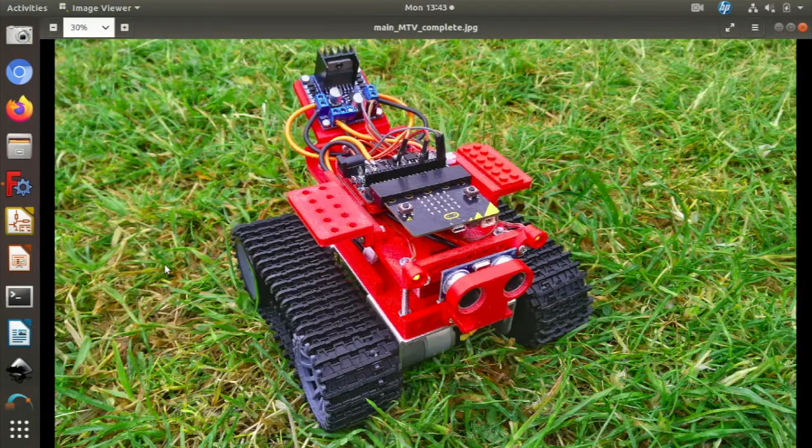It's Joe here again, and I've been asked to make a follow-up tutorial continuing our work with FreeCAD. If you haven't watched it already and you're interested, we did a getting started with FreeCAD video last time, so if you look on the Ffiws channel you will find that and you can go through that. And we're going to build on that today, and we're going to explore some other ways to create objects and extend our knowledge of the sketching tools in FreeCAD.

What we're aiming to do, so I'm quite proud of this, in this month's Hackspace magazine, who some of you might know that I write for, I was asked to write a tutorial about building up a robot. So I've designed and built this robot, apart from the bottom bit where the wheels are and the metal chassis. That's an off-the-shelf kit available for about 20 quid off eBay. But the rest of it I've designed and built myself. So all the red stuff is stuff that I've designed in FreeCAD and 3D printed, and then I've added some electronics which I'm not going to particularly talk about today to control it.

So the thing I think is cool about this robot is that everything is modular. You can see that it has all these little racks of holes in various points across the front here, and you can see that bits like these little LED headlamps have been attached to these hole points, and these holes are all on 10mm between each hole in like a grid wherever they appear. So that means that it's kind of modular. It's quite easy to make extra parts for it.

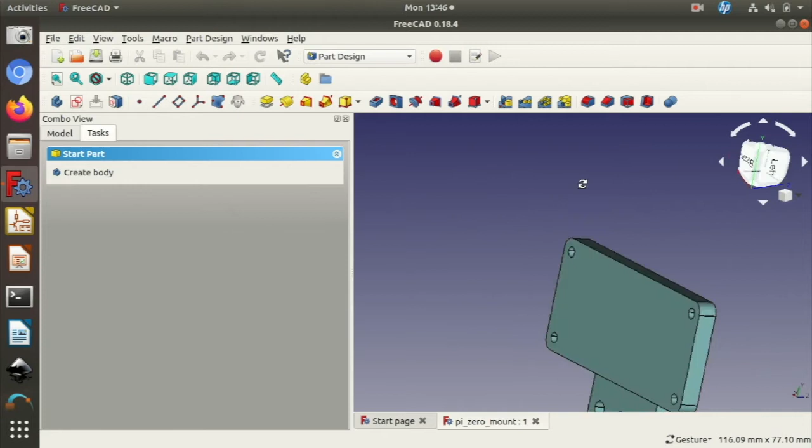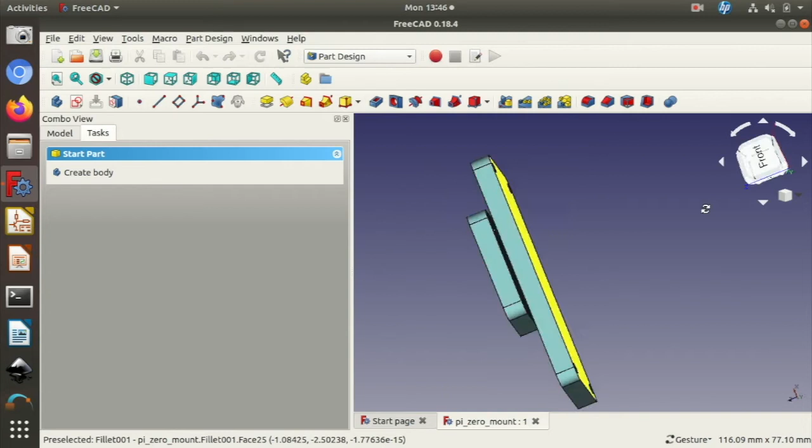As you can see, this main rectangle here is exactly the size of a Raspberry Pi Zero computer, and these four holes are the same size mount holes as the little Raspberry Pi Zero computer has, and so it should mount up to there with some nuts and bolts pretty precisely. And then the only other bit is it has this tab which has three of these mount holes which are the same size and at the same spacing as the mount holes on the modular robot.

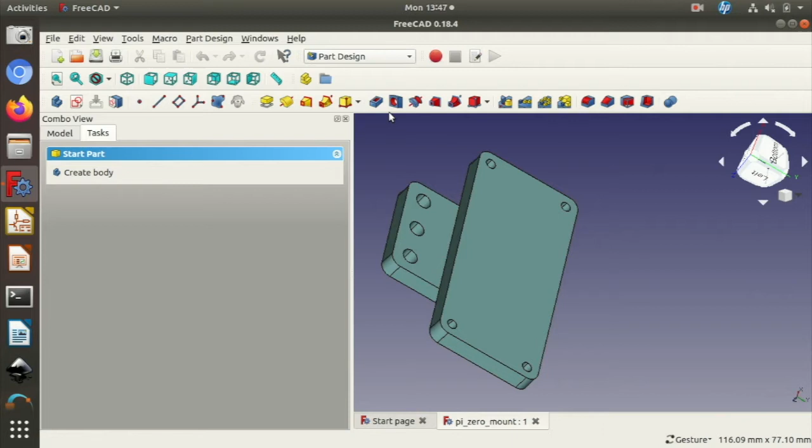You can see that when I've opened this file, it's opened in the Part Design workbench as opposed to the Part workbench, which we used in the last tutorial primarily. There's a few reasons that I've done that. So what I'm going to do now is I'm going to close this, and I'm going to create a new project, and we're going to start again. But if your version of FreeCAD hasn't opened you up onto the Part Design workbench, go there now.

Okay, so the first thing that you'll see is the Part Design workbench offers you as a starting point this start part, which is hard to say, and it has this Create Body option, which we are going to click in a second. So in Part Design, everything you design should be part of a body. You can have more than one body in a project, but a body is an object which is a single continuous solid object. So that means it's not like an assembly where you might have two or three different objects. In a single body, there would be one object, and it would be continuous. It wouldn't be like a blob of something with a totally separate blob of something else, because that wouldn't be continuous then.

A way to think about it that's quite easy is if you imagine a nut and a bolt. If you have the nut and the bolt separate in your hands, then they're two separate bodies. So if you wanted to model them, that's how you would model them. If you put them together, they're still two separate bodies, but they create a fastening assembly.

So they're still actually separate items, it's just that their mechanisms join together. So yeah, so we're going to create a body. The other thing of note about a body, and this might become more obvious as we go along, is that a body automatically fuses together any objects that are touching within it.

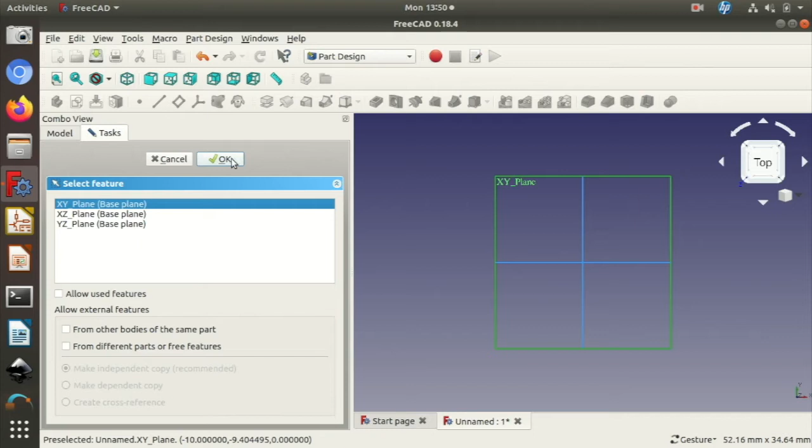So we'll OK that. And then it jumps us to the Sketcher workbench, which should look familiar from the last video. So we're going to start our sketch in a second, but I've actually downloaded a little plan from online of a Raspberry Pi Zero, just to remind me of the dimensions that we're aiming for. So basically we're going to make that first big rectangle. So we need a rectangle that's 65 millimeters long and is 30 millimeters high.

So to do that, we're going to use the create rectangle tool, and we're going to draw our rough rectangle again, and like last time we've got these 4 degrees of freedom, so we need to constrain it somehow. Okay, so a couple of different things that we didn't do last time. We're going to start to use this constraint here a lot more, which is where you create a symmetry between 2 points with respect to another line or a third point. It's a really, really useful way of constraining a sketch.

So what I'm going to do is I'm going to select that point there, that midline there, and this point here, and I'm going to click that constraint button. Now you can see what it did was it made the distance between this point and that line and this point and that line equal, and it is now constrained to always maintain symmetry around that point. I'm going to do the same with that point, that line, and this point here. So now it adds these 2 little red triangles, and this creates a symmetry there.

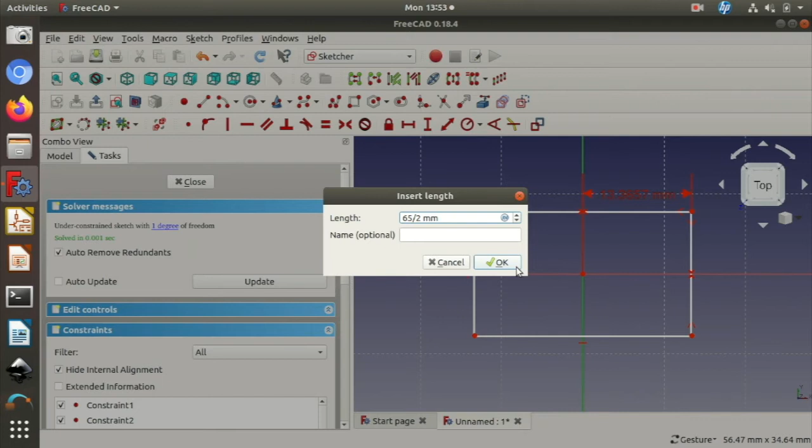Now, if you are clever, you can work out 65 divided by 2, but here's a top tip. In FreeCAD and lots of other CAD environments actually, and in Inkscape for example, if you put in 65 divided by 2, it will work it out for you to 32.5. Not too difficult to work out half of 65, but if it's a more complex measurement, then it's worth knowing that little tool.

Okay, I've forgotten how tall. No, I haven't. It was 30 millimeters tall. So we'll click that line and that one, and we'll put a vertical distance of 15, obviously half of 30. Okay. So there we go. We've got the outside without the sort of radiused edge. Actually, we could add those radial corners at this point.

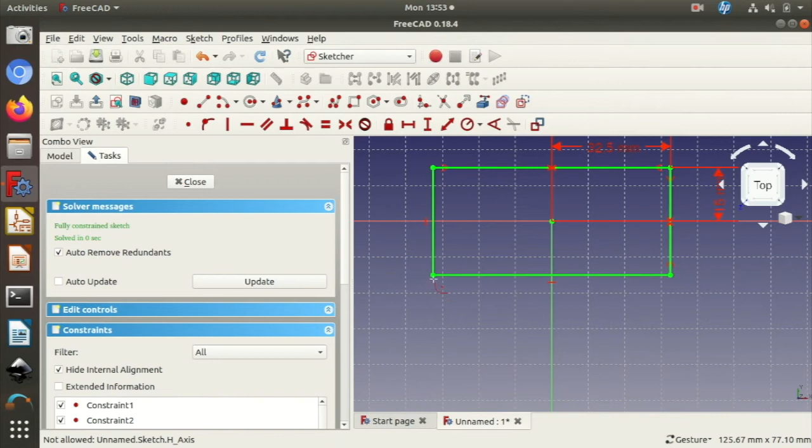This tool here is create a fillet between two lines or at a coincident point, and you can click a point and it will add a fillet, and then you have to constrain the radius and sort your lengths out again. So actually I tend to do fillets at the end when we've got the object back in Part Design, by clicking the lines on the edges and using the fillet tool.

So we'll do it that way, but that's just to know that that's there. Okay, what else do we need on our plan? Well, we need these 4 holes here. Okay, so to do these 4 holes, we are going to draw some circles. So what we're going to do is we're going to draw a circle, and we're going to roughly put it

in the right position. Interestingly, in the Sketcher tool, if you think of these 2 lines intersecting, and this is 0 and this is sort of coming out positive. If it was a graph, it would be counting up this way in numbers and counting down negatively this way. FreeCAD isn't too worried about whether numbers are positive or negative in the quadrants. It just imagines. So say you set a distance between this line and this point here. It doesn't need you to put in minus 27.24 or whatever. It just presumes that that's what it is because of where it is on the page. Anyway, don't worry about that too much.

What we're going to do is we're going to set the diameter of this hole to the diameter of the hole that is on the plan, which was, I believe, 2.75 millimeters. Yeah, 2.75 millimeters. But this is written as a diameter, so again we can use our divide by 2 to set the radius, because you set the radius with this tool. So we're going to click this tool and it asks for the radius, so we're going to say 2.75 millimeters divided by 2, or 1.375 even. There we go. So that's sort of the right size.

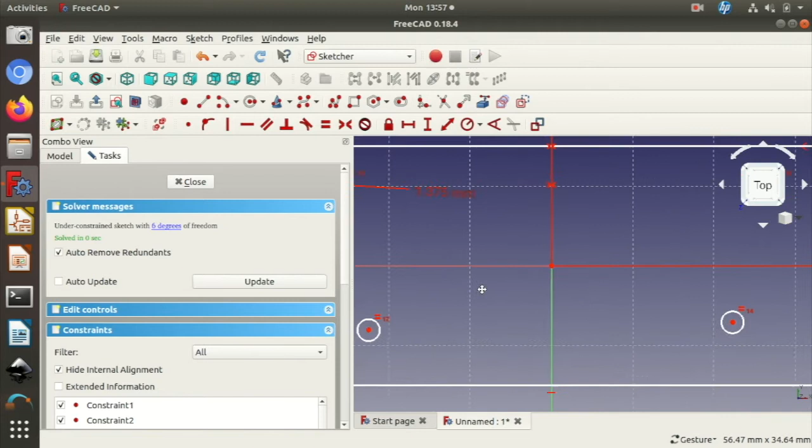So what we're going to do is just zoom in a little bit. I'm actually going to use the same idea. So I've selected the centre of that circle, this middle line, and then I'm going to move across and I'm going to select this centre of that circle, and I'm going to select a symmetry between those. So again, those are going to be symmetric around this central line. I'm going to do the same on these circles, select those,

and then I'm going to do a really bad zoom and lose my work. So there we go, just use the zoom tool to bring that back in. Gosh, zooming is a pain on this laptop, it has to be said. Oh dear, it's hard because it's so small. There we go, that's better.

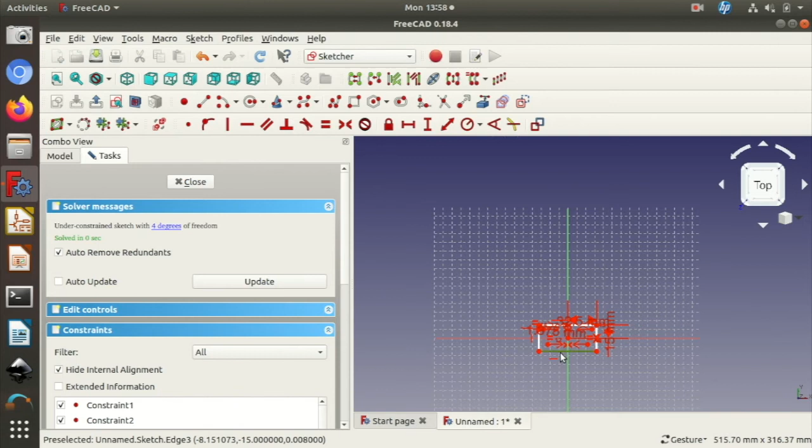So where were we? I selected that one. That one's got one there. So I'm going to do a symmetry between this and this. There we go. Oh, I obviously selected too many things. 1 point, one line. Oh, there we go. Okay. Now I'm just going to have a quick look at the plan.

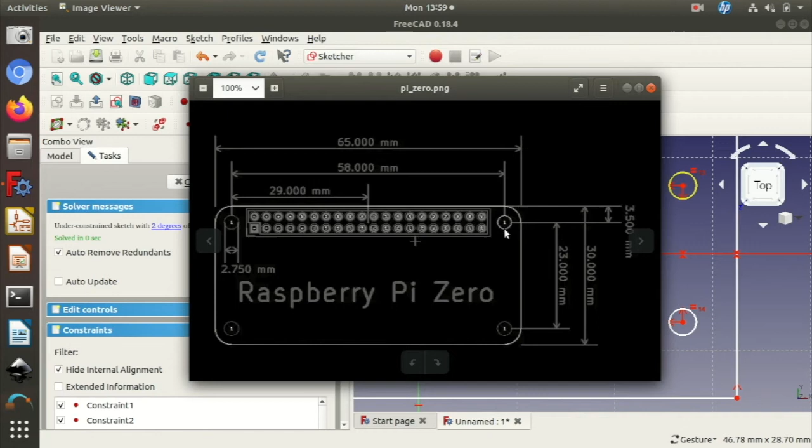So again, we see that the hole centres from the centre line of the board are 29 millimetres, and they are all 23 millimetres between the centres of these two holes. Okay, so if we select this and select the vertical height there, we can do it as 23 divided by 2. And then if we zoom out slightly and select the centre of that one and the centre of that one, and select the distance between this and this as

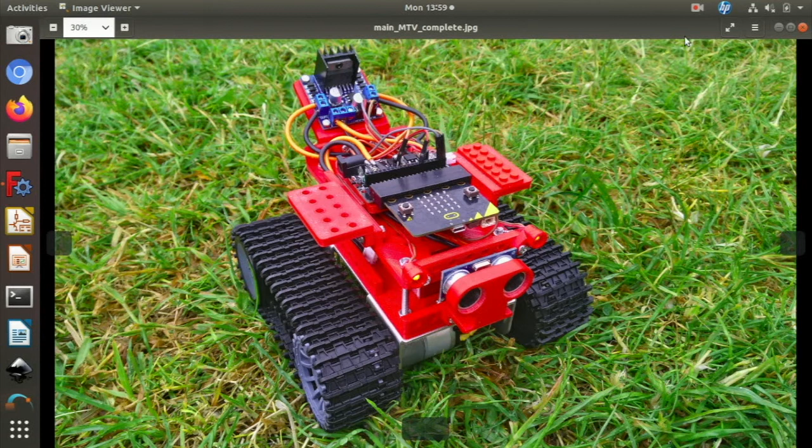20. No, what was it? I've forgotten. I've closed the plan. Was it 53? I can't remember. Let me just find that. Plan again. They were 58. There we go. My memory is useless. 58 millimetres. So put that at 58. Okay, there we go. So it's all gone nice and green. Everything's in the right place.

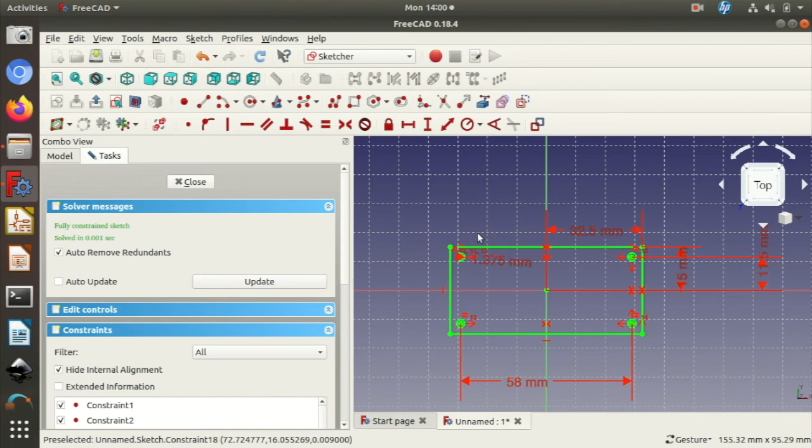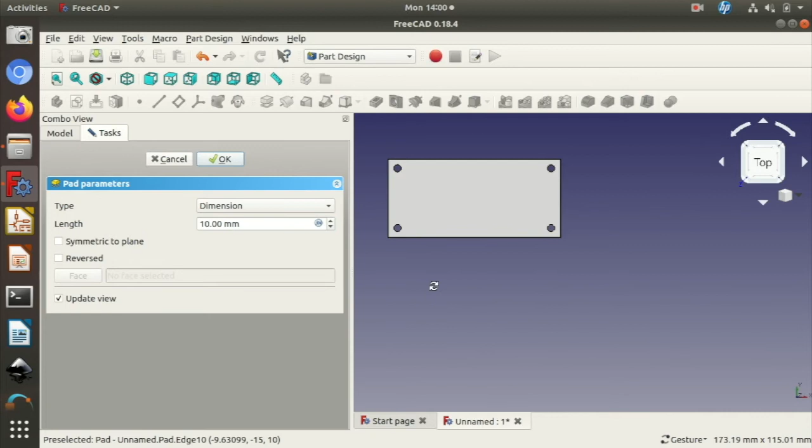If we wanted to tidy it up a little bit, we could move some of these constraints out of the way so we can see what things are applying to what. If we close that now, we have a fully constrained sketch in the preview window. So yeah, we've got some tools, the things that we can do with that sketch, and similar to the last video, we're going to use the pad tool, but 10 millimeters is a bit thick. I've been making these brackets 4 millimeters thick. So there we go. So we have our rectangle.

Now, of course, we want to add that other part that we're sticking off with the mount holes. So what we're going to do is create another sketch, but we're going to map it to a face of this object. So I'm just going to make sure that I'm on the top view here. So we're looking down again as if this was the bed of the 3D printer, and I'm going to select the top face of this object, and I'm going to click the sketch button again to add a new sketch.

Okay, so now we're back in the sketcher, but we can't change any of the original sketch in this because this is like an additional sketch, but we can add another sketch and pad to it, and it will be joined to the original article. So what we're going to do is draw a rectangle roughly in the right place for where we want it, and we're going to do some very similar things again.

So it's good practice. We select that point, that line, this point, make a symmetry. We're not going to make a symmetry this way because we want it to be off center and to be hanging off the bottom of this part. So I think we want this dimension to be, I've missed that. We want this dimension to be, I think I have this at 25 millimeters or 30 millimeters, 25 millimeters. Can't remember. That looks about right. Yes, so that's pretty much the object that we need.

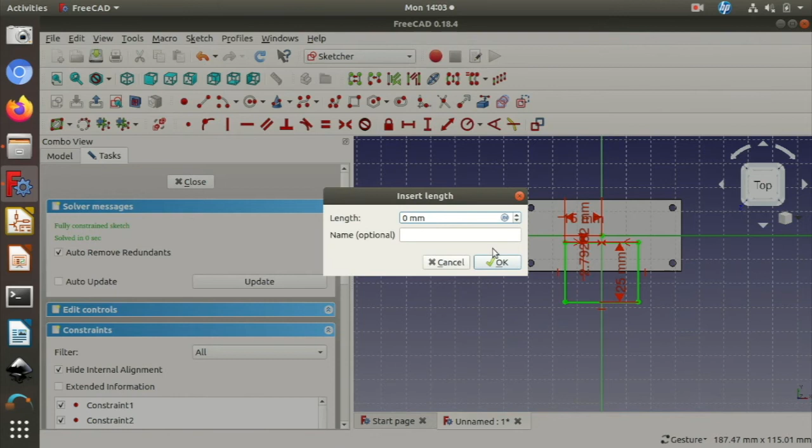We've got 2 degrees of freedom. So one is that it doesn't know where it's anchored, what position it's in, and one is the width of the item here. So if we create a horizontal constraint between that point and that line, and we make that 15 because I think we want this to be 30 millimeters. And then if we get that point and this line and give that a vertical distance of 0, then it basically just ties the top of this object to that line. And that's a fully constrained sketch.

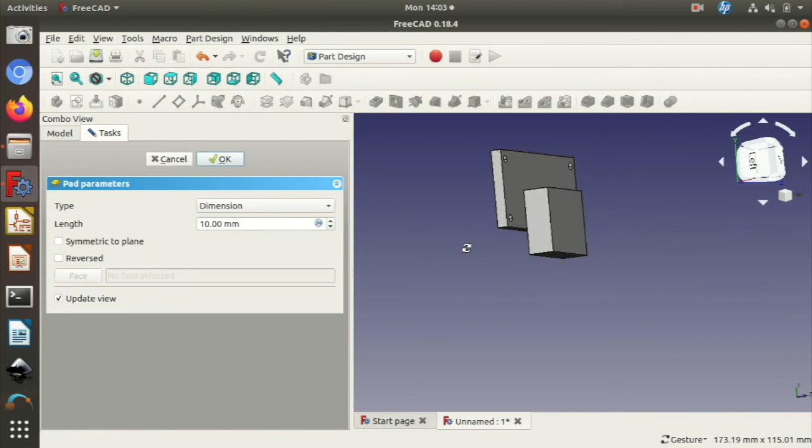Okay, if we close that again, we're going to pad this sketch. Now, I can select this sketch and I'm going to click the pad tool up here. Again, it automatically sets it at 10 millimeters. Actually, I'm going to change how we do this. What I was going to do was map another sketch of this face and put 3 circles on. No, I will do that, because then I get to show you another tool. That's what I was planning to do. Sorry about that. Let's make that 4 millimeters again.

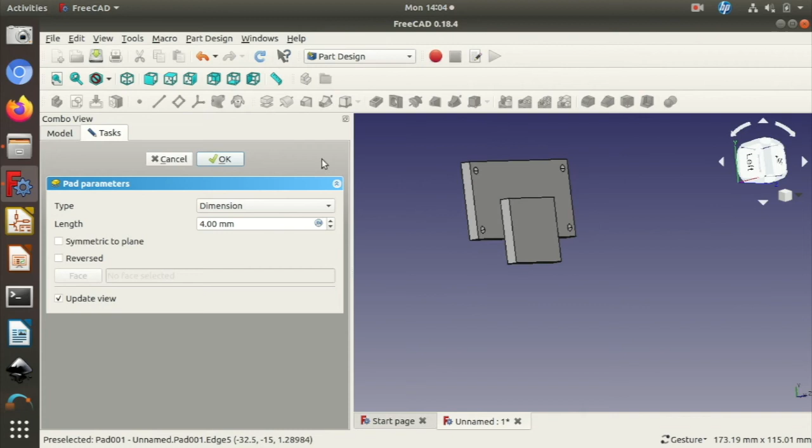And actually, I don't think it's quite sticking down off this piece enough as the one that I made previously. So let's just OK that for now, but then let's go back in and edit this sketch. So we're going to find this constraint, and we're going to change it to a distance of 5 millimeters. That looks better to me. Close it, and then you see that we've moved it down. Okay, so we're getting there.

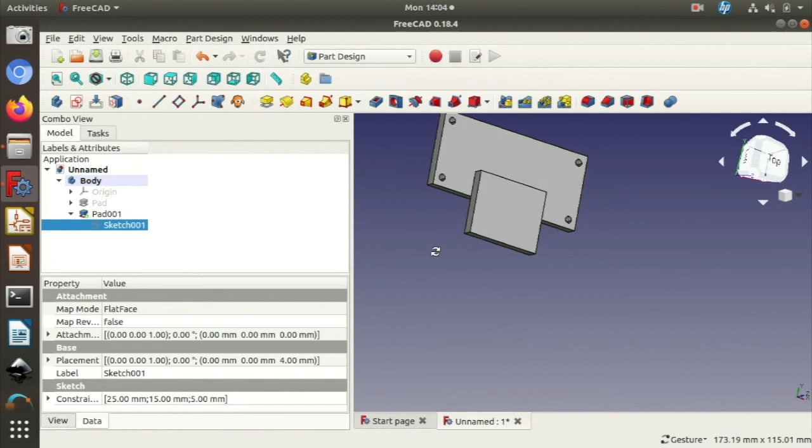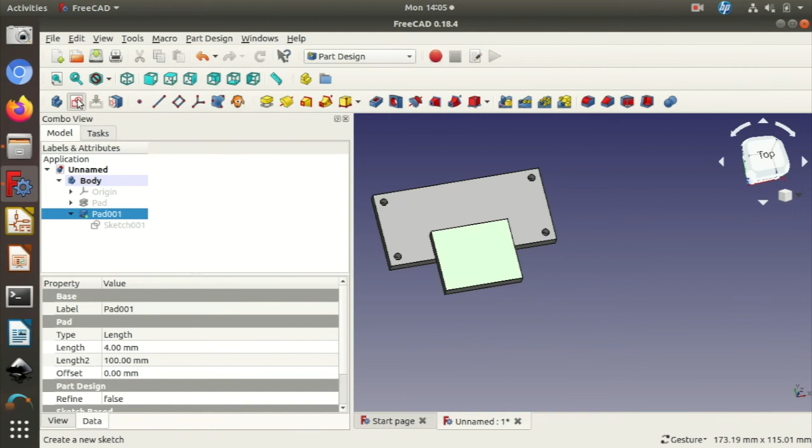We've got our big rectangle, and we've got our small rectangle that's been padded. That's going to be the kind of mounting bracket. And again, we haven't had to select these objects and combine them together. They just automatically are together. Okay, let's make the holes and then let's put the nice fillets on to make the corners nice. So to make the holes, we want to put the holes into this part of the body. So again, we're going to make a new sketch that's attached to that part.

Okay, so there's a few little ways that you can make holes from sketches. The way that I'm going to do it is to use a hole tool, and the hole tool just needs to know that there's a circle in the sketch that it wants to turn into a hole. It doesn't actually need the circle to be the right size, but I am going to make it the right size just so that I can show you an alternate way that it would work.

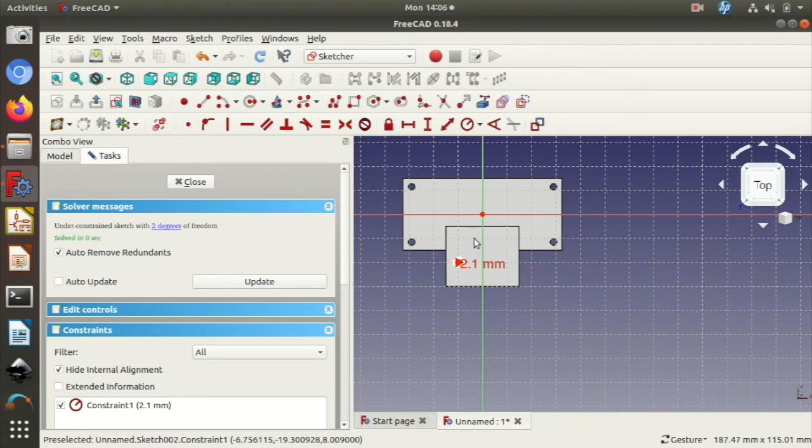So I'm going to draw a circle, and then I'm going to constrain the radius of the circle. And I've been making these holes on the robot 2.1 millimeters radius. That's basically so they'll take a 4 millimeter bolt through them with a little bit of clearance. Okay, so if we just zoom in a little there, I've made a circle, and it's roughly in the right position.

Now I want to make 2 more circles that are the same, so I could copy and paste and then I could painstakingly line them up and do stuff, but another way to make a series of circles or a series of objects, you can do this with any sketch object, is to select the object and then click this button here, which is create a rectangular array pattern of the geometry. So basically, it creates a tiled pattern of the object that you selected.

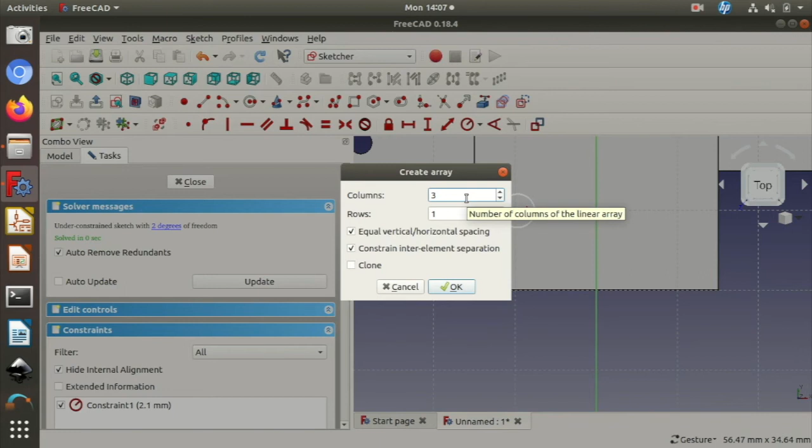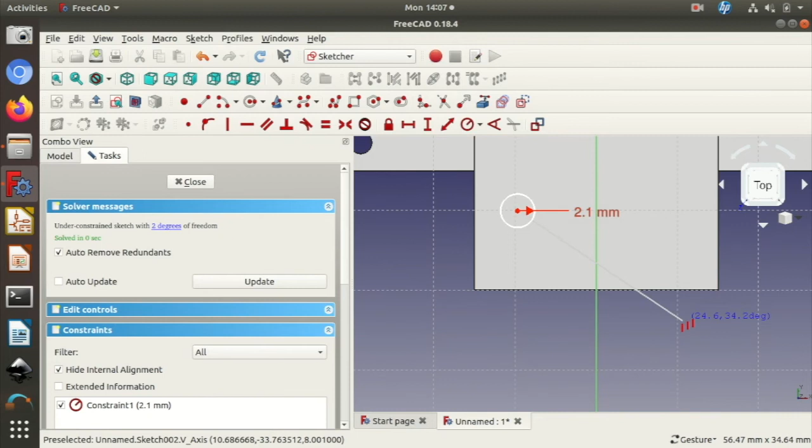So we're going to make 3 holes, which this is set to already, including the original. So we're going to make 3 vertical columns of circles in 1 row. So we'll OK that, and then what we've got is this little icon that we can drag out, and when we click, it will create the holes based on where we've clicked.

Now obviously we want these in a line, so somewhere in amongst your creation there is an angular constraint. So if you double click on that and change the angle to 0, it puts them in a straight line. Similarly here, there's a constraint that it's created that's the gap between the center points of the hole. So I know that on our robot we made all these holes 10 millimeters.

Okay, the next bit is, and I usually drag it to roughly the right place, I kind of want to place these holes now exactly on this 10 millimeter grid line, so 10 millimeters up from the edge, but also with the center point on this line. So if we click the centre point of that circle and click that line, click a horizontal length and set that to 0. Actually, I don't want this 10 millimetres up. I want it 5 millimetres up. That's how it will match this.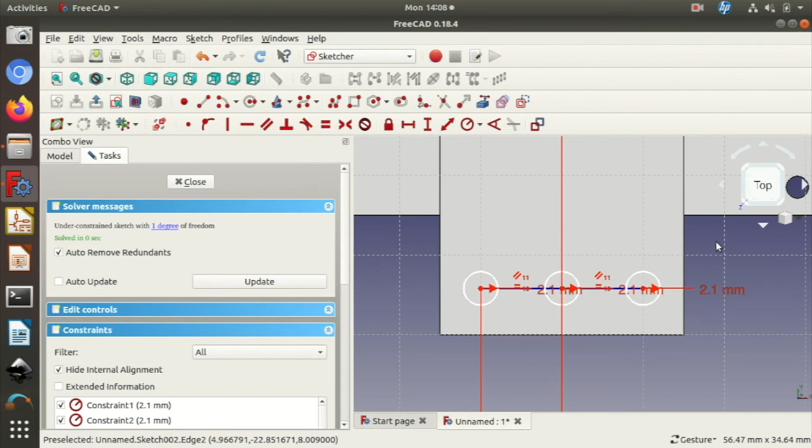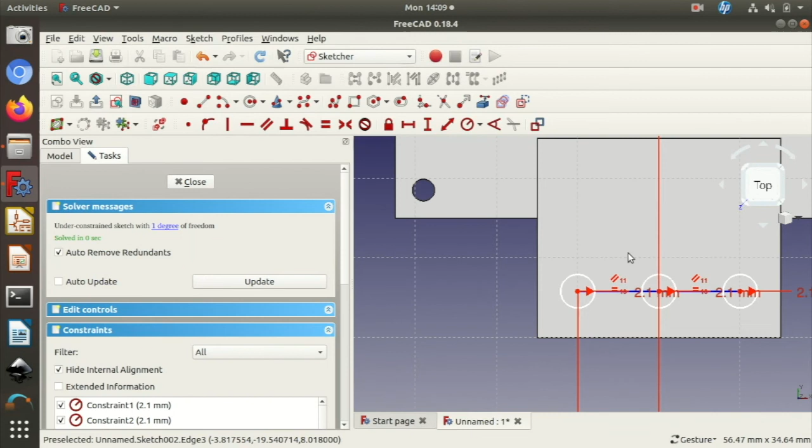So actually, I've got a little bit of working out there to do, because I need to set the reference off something that exists in this sketch. So I'm probably going to set it off this line here. So what I can do is count these grid lines. So 10 millimetres, 20 millimetres, 30 millimetres brings me to here. So if I come down to 25 millimetres, then that should put me exactly 5 millimetres from the edge of that object. So click this, zoom out a little bit, click that, click the height object, set that to 25.

There we go, it's fully constrained. We can tell that because the sketch underneath all the constraints has gone green and it's in the right place. Okay, so now if we select that sketch, there is a new tool that I want to show you, which is this one, create a hole with the selected sketch.

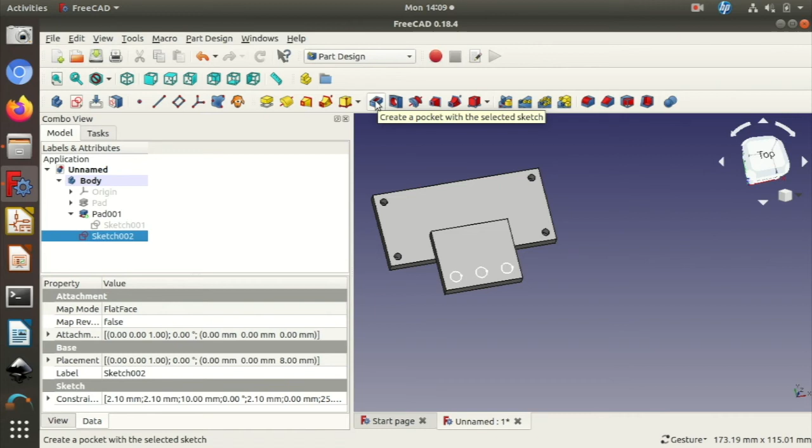Actually, before I show you that, I'm going to show you this. This is not particularly for this, but you can also do this if you wanted to create a pocket which doesn't necessarily go all the way through the sketch. You could click that tool, and it's done it to a length of 5 millimeters, which is all the way through. But if I change it to 2 millimeters, you can see that you can create a pocket into your item, and of course you can change the depth of that.

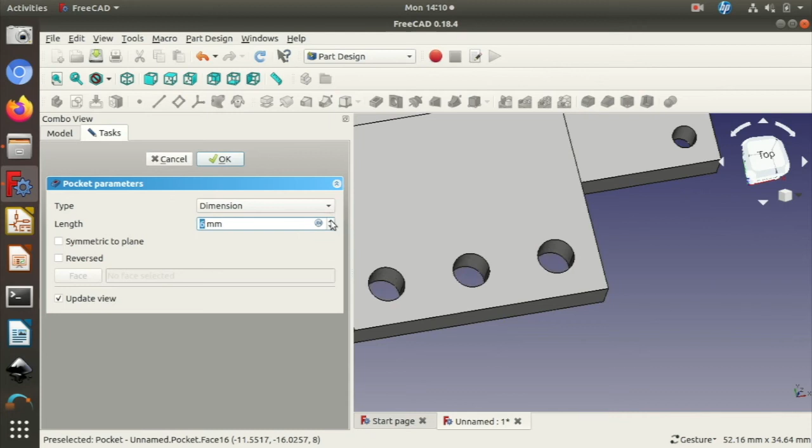Be aware that if you wanted to create a hole and you left it at 5 millimeters, if you went on and added some other object on this side, it would actually cut into that object as well. So sometimes it's worth making sure that you're getting your dimensions correct, because sometimes in a complex design you can't work out why something's got a hole in it.

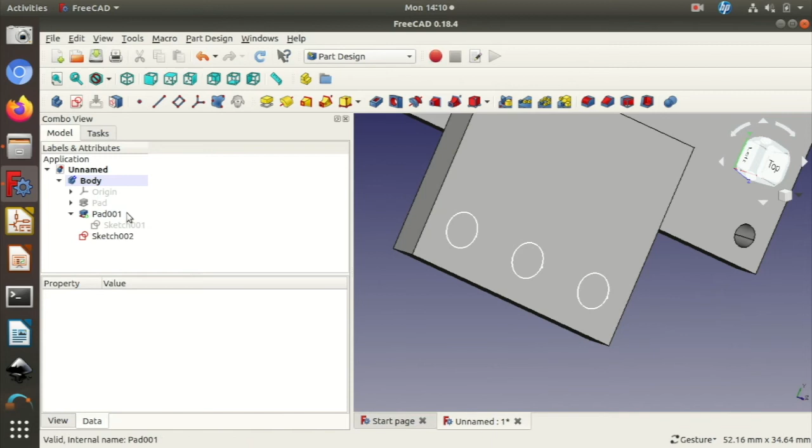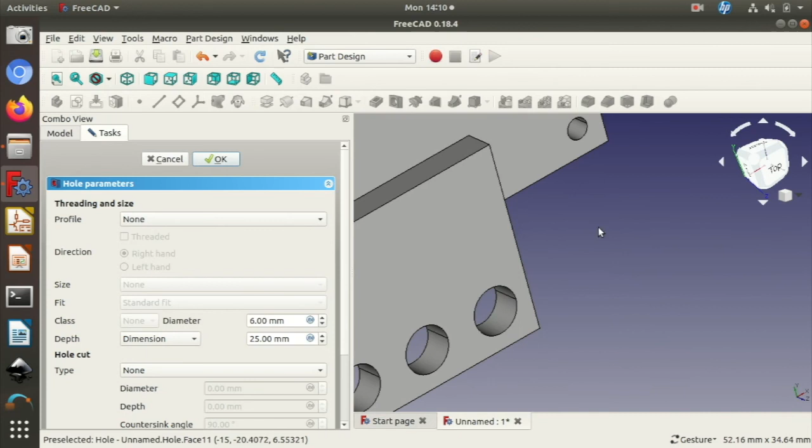Okay, the hole tool is slightly different. So we're going to click the hole tool, and you can see, oh, it's made some holes, but they're massive. They're like 6 millimeters. So the reason for that is that the hole tool doesn't actually worry about what size your original circle is, and it allows you to change all the geometry in this dialog box that pops up. So we're going to put them at 4.2, which is the size that we want, and I'm going to set the dimension to 4 millimeters, which doesn't quite go through all this hole.

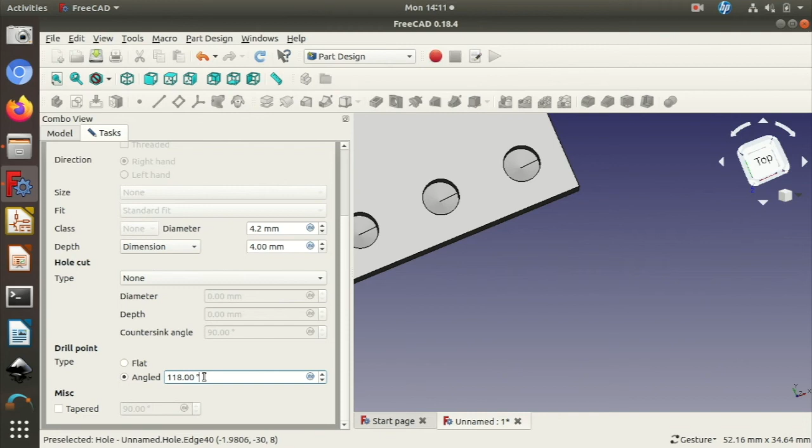So this is quite interesting. You can see there that it's created like a weird pointy bottomed hole. Well, that's because quite often in CAD you want to design something that's going to be drilled by a CNC machine, for example, and so it defaults to the angle of a common drill end. Because if you imagine a handheld drill, if you drill but you don't go all the way through, it leaves the pointy end of the drill in. So we're going to change that to flat, and then of course 4 millimeters clears all the way through there. Okay, so we've pretty much made our part. We're going to OK that.

We're going to get it to a more sensible size, which is really hard on this laptop and drives me a bit potty. Okay, the only thing we need to do now to make it like the other one is we want to select these edges by clicking these edge points, and this is to make our fillets like we did the other week. Click the edge points and click the fillet tool, which is this one here,

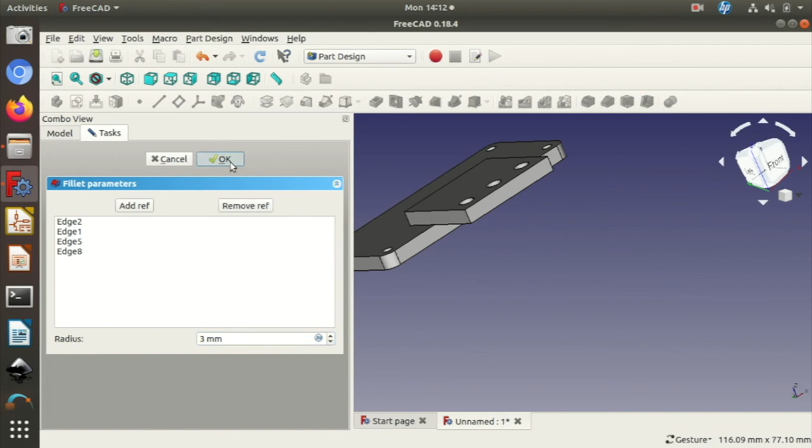and funnily enough, I've used 3 millimeter radius fillets on all of this robot thing, and actually the Pi Zero computer that we're designing for has 3 millimeter radius edges as well. So that was a happy coincidence that makes it look very well designed when it's just a bit of luck, really. Oh, I've missed one there.

Let's just stop that. Let's just put a radius on these. Okay, create a fillet. Change that to 3, and we're done. Okay, there's our piece. So, a couple of things. One is

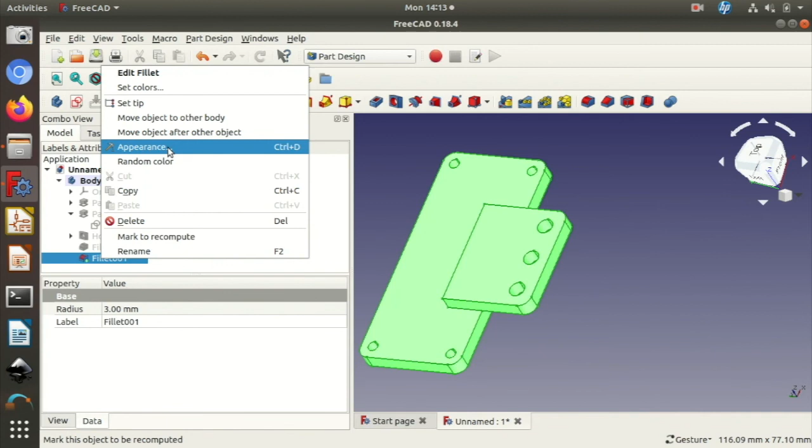when I showed you the other piece, it was a different colour, and somebody asked me on Twitter the other day, how do you change the colour of objects? Well, if you right click over the selected object, there's an appearance tab. You can, sorry, I clicked that a bit quickly. You can click the shape colour, and you can change the colour of the object, and also you can do things like change the transparency of the lines and parts.

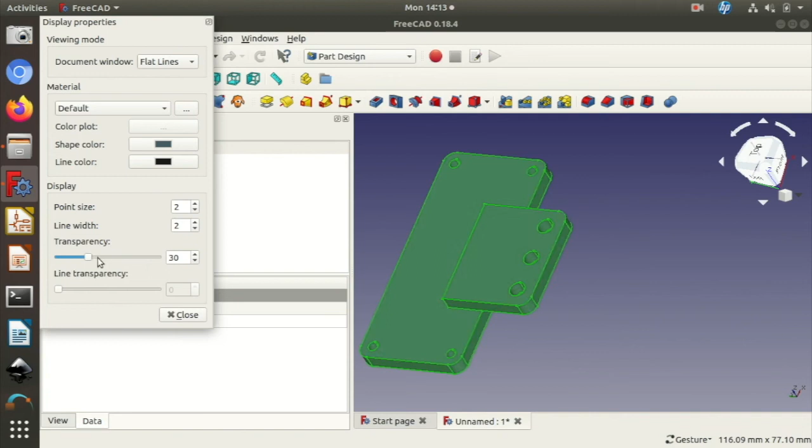That's useful if you've got a complex object and you need to be able to see what's going on inside an object, that can be a very, very useful thing. Okay, so there we go. We've made our part as a body in part design. Last little bit on this.

Something that people get weirded out with bodies is they can't double click them and select them and move them. And that is true. And also people sometimes want to copy a body and create another. Well, actually, it can get very complicated because if you think about it, this body is made up of all these reference points and all these operations that are all sort of related to each other.

So one little tip is that if you wanted to say print 2 or 3 of these, or you were making an assembly and you needed to have 2 or 3 and you need to move them about, a way to do that is to select the body, or highlight the geometry of the body, and go in the part design thing, and you can find somewhere create a... am I in the wrong bit? Where am I looking? I'm looking because I don't do this often.

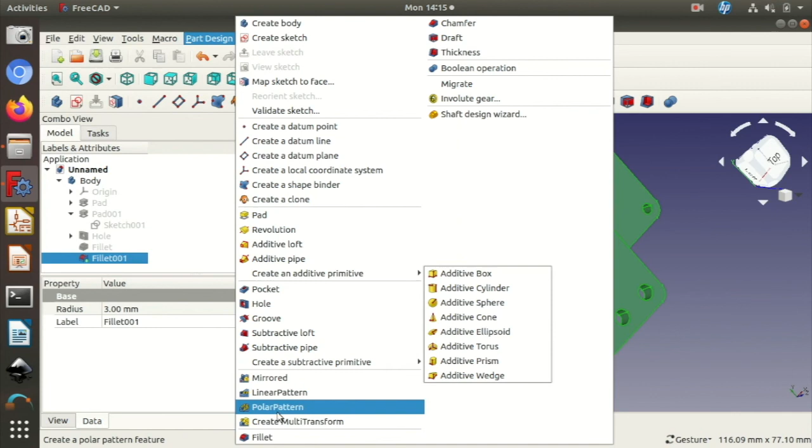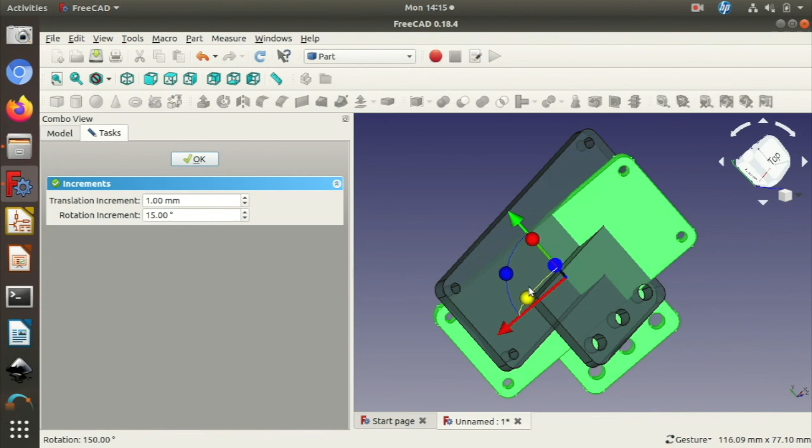Actually, sorry, you have to change to the part workbench, and there you go into part, and you can create a simple copy. There we go. So now you have this simple copy that if you, in the part workbench, double click that object, you'll remember from the other tutorial that you can then move this object and rotate it using this set of tools which we covered in the previous video. So that's if you wanted to create multiple instances of that body. It's a simple way of doing that.

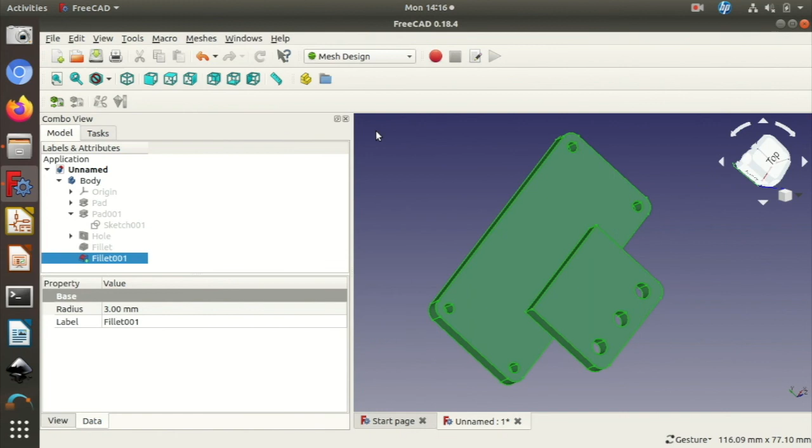Okay, we're going to leave that there, apart from we're going to select this and move over to the mesh design workbench, and then we're going to do file and export an STL of it. So we'll call it RPi0, hit the caps key there, bracket, and we'll save it on my very messy desktop. It'll save it as an STL.

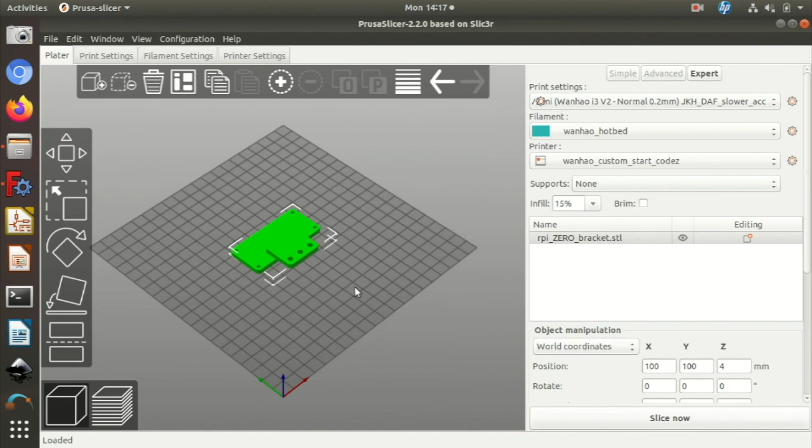Let's click save, and then if we go out of there and open up, so this is Prusa Slicer, which is one of the slicing tools we use in the Ffiws makerspace to slice objects to make them ready to be 3D printed. In the Ffiws makerspace, these would all be set up for you, and you would just go in, click import an STL, find the file that we just created, which is there, RPi0 bracket, and there we go. There's our object sat on the imaginary 3D printer.

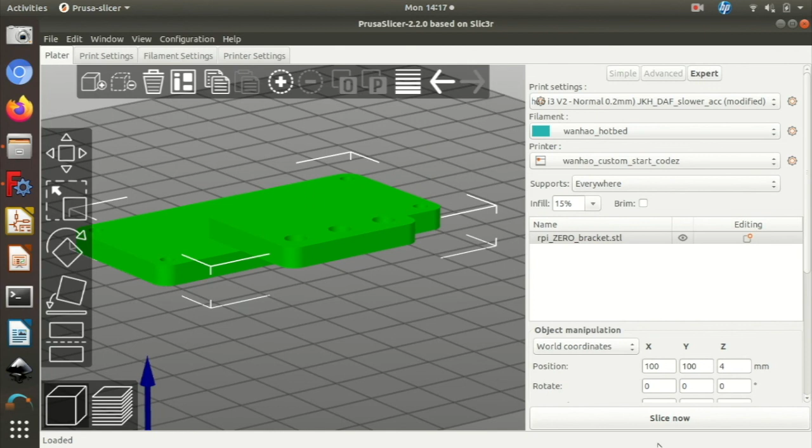It needs some support because when we try to print this higher part of the object, it may sort of flop over before the plastic cools. So what we'd do is set the support setting to everywhere, and this is just a quick overview. Click slice now, and you can see that it's created all the slice patterns for how it's going to print that object, and added the support materials. Click export G-code, save that to your SD card in the Ffiws makerspace, put it in the machine and click print. Couldn't be simpler.